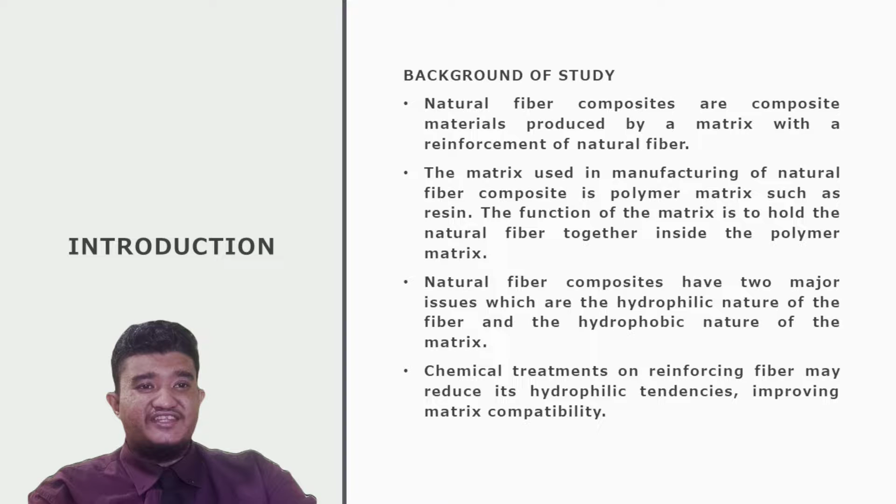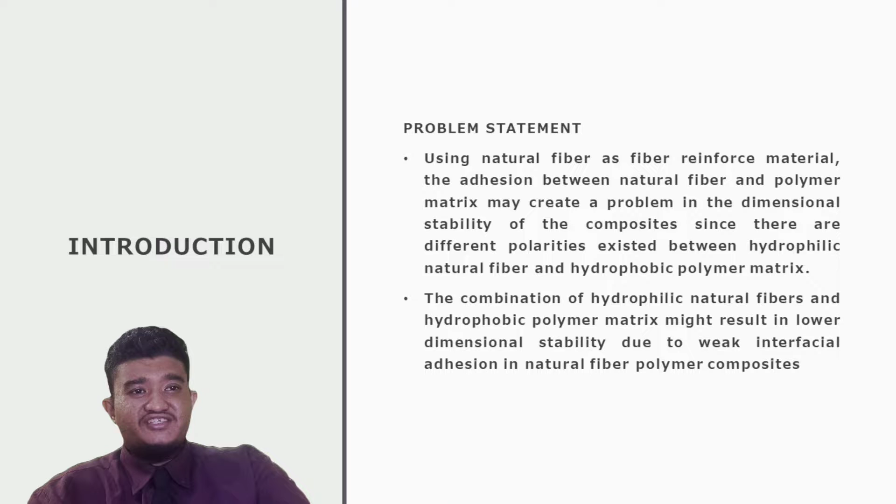Next is problem statement. Using natural fiber as fiber reinforced material, the adhesion between natural fiber and polymer matrix may create a problem in the dimensional stability of the composite, since different polarities exist between hydrophilic natural fiber and hydrophobic polymer matrix. The combination of hydrophilic natural fiber and hydrophobic polymer matrix might result in lower dimensional stability due to the weak interfacial adhesion in natural fiber polymer composite.

Next part is significance of study. From this study, the researcher will get information about the effect of chemical refinement on natural fiber composite properties. The information obtained will guide them on fabrication of natural fiber composite in selection of the best chemical refinement method for the specific filler to be used. The finding from this research also can be used to aid researchers in developing new natural fiber composite with improved performance.

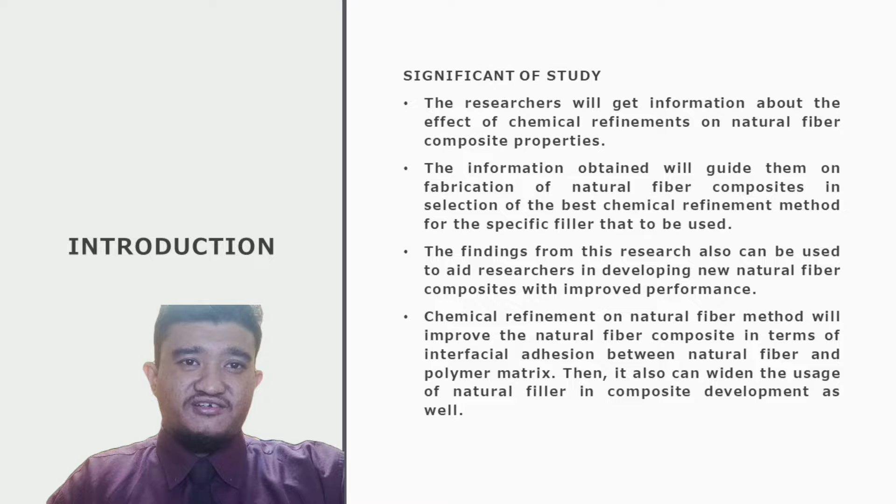Chemical refinement on natural fiber will improve the natural fiber composite in terms of interfacial adhesion between natural fiber and polymer matrix. Then it also can widen the usage of natural filler in composite development as well.

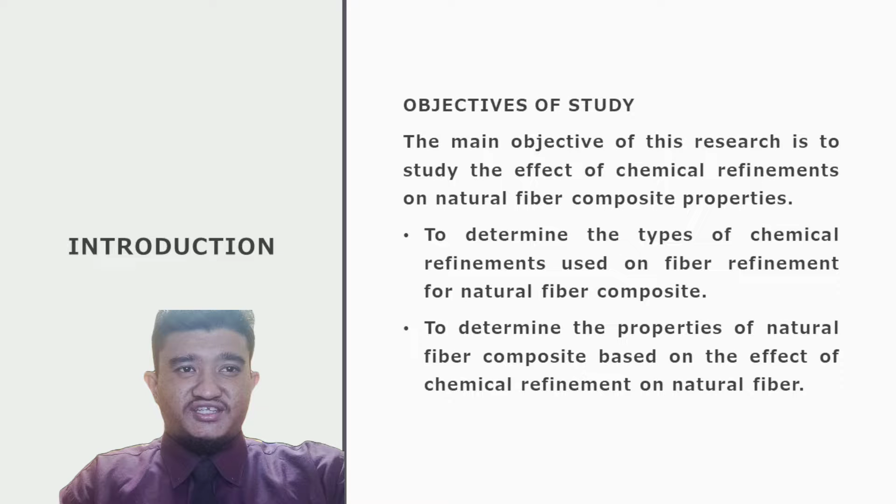For objective of this study, the main objective of this research is to study the effect of chemical refinements on natural fiber composite properties. This study suggests several research objectives to be achieved as follows. First, to determine the type of chemical refinement used on fiber refinement for natural fiber composite. And second, to determine the properties of natural fiber composite based on the effect of chemical refinement on natural fiber.

Next, we move on to literature review. I will summarize all chemical refinements being used in fiber refinement. From the finding in alkaline treatment, sodium hydroxide treatment reduced the hydrophilic character of the coir fiber, as demonstrated by the lower water absorption percentage of sodium hydroxide treated coir fiber composite.

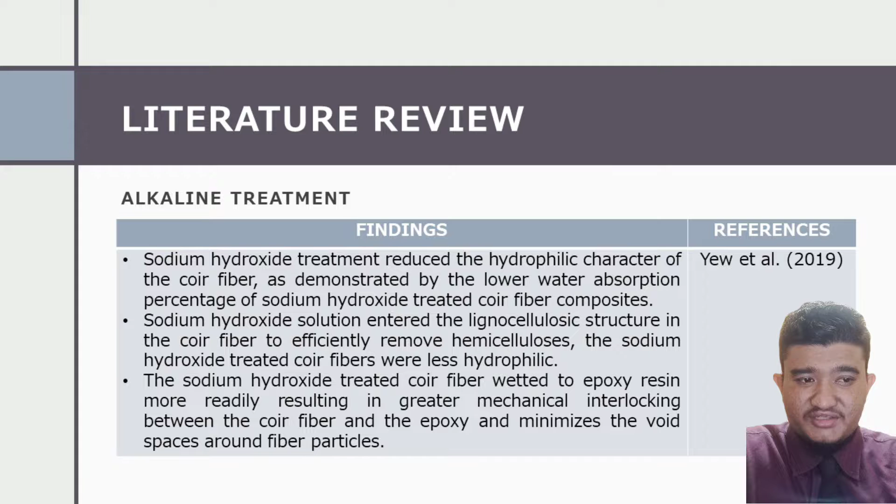Sodium hydroxide solution entered the lignocellulosic structure in the coir fiber to efficiently remove hemicellulose. Then the sodium hydroxide treated coir fibers were less hydrophilic. The sodium hydroxide treated coir fiber wetted to epoxy resin more readily, resulting in greater mechanical interlocking between the coir fiber and the epoxy and minimizing the void space around the fiber particle.

Next chemical refinement method is silane treatment. From the finding, the silane treated polylactic acid short bamboo fiber composite obtained the highest mechanical properties in tensile strength and Young's modulus. The silane treatment improved interfacial adhesion between the resin and the fiber, as well as the mechanical properties of the composite.

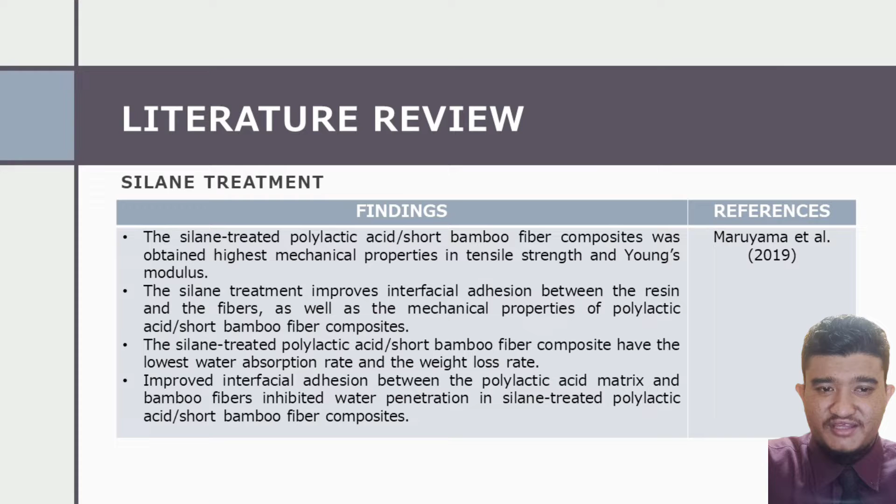The silane treated composite has the lowest water absorption rate and weight loss rate. Improved interfacial adhesion between the polylactic acid matrix and bamboo fiber inhibited water penetration in silane treated composite.

Next, we move on to acetylation treatment. From the finding, the tensile strength and modulus, also flexural strength of polypropylene acetylated banana bunch fiber composite increased due to the removal of lignin and extractables, slight increase in cellulose content, and a little portion of hemicellulose converting to acetylated hemicellulose. The acetyl group reaction reduced the hydroxyl groups on the fiber surface, making the fiber more hydrophobic.

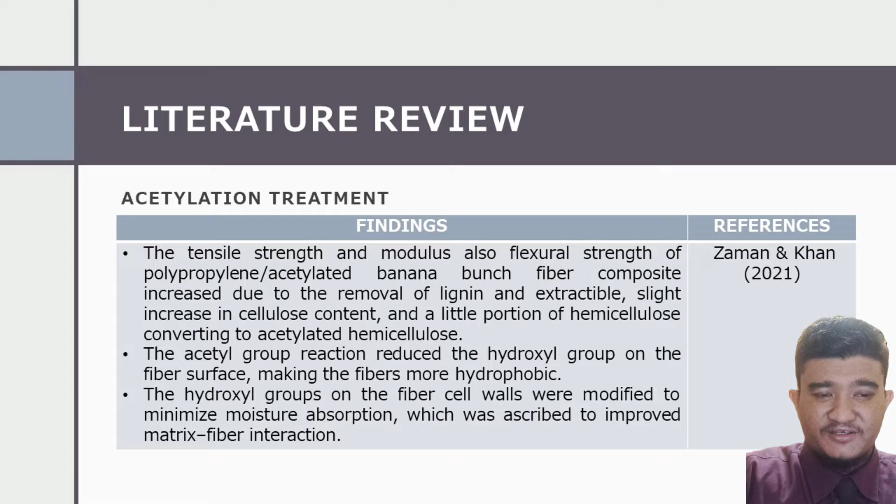The hydroxyl group on the fiber cell walls were modified to minimize moisture absorption, which was ascribed to improve matrix fiber interaction.

Next part is benzylation treatment. From the finding, the removal of lignin and hemicellulose may have improved tensile strength by making it easier for the fibers to reorganize in the tensile direction and causing higher tensile strength.

The benzylation treatment removed contaminant from the surface of the fiber and improved the interface quality by interfering with the moisture absorption process. Due to the fibrillation effect, the treated fiber displayed a considerable improvement in interfacial shear strength value after benzylation treatment. Fibrillation increased the surface area available for interaction with the matrix material for penetration and bonding with the fiber cell, resulting in improved interfacial adhesion.

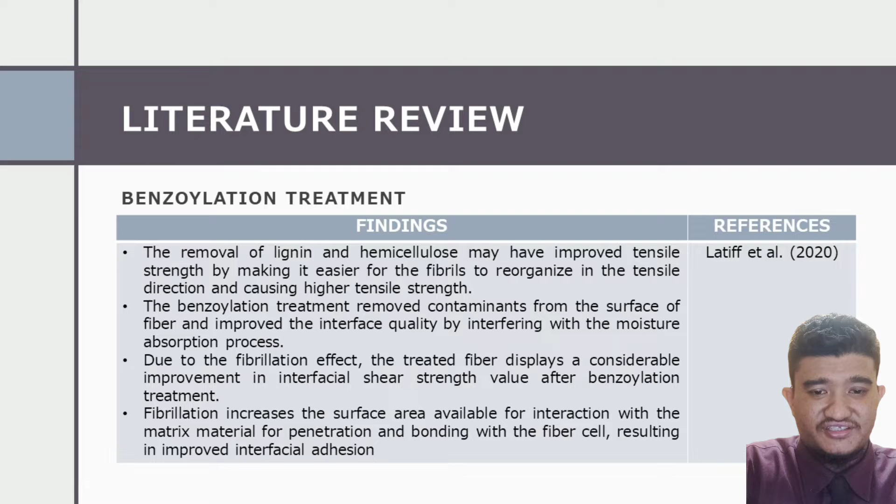Next is sodium citrate treatment. From the finding, the increase of tensile and flexural properties of treated composite may be explained by the fact that a stronger fiber matrix adhesion results in more stringent limitation on relative displacement between fiber and matrix, especially in the

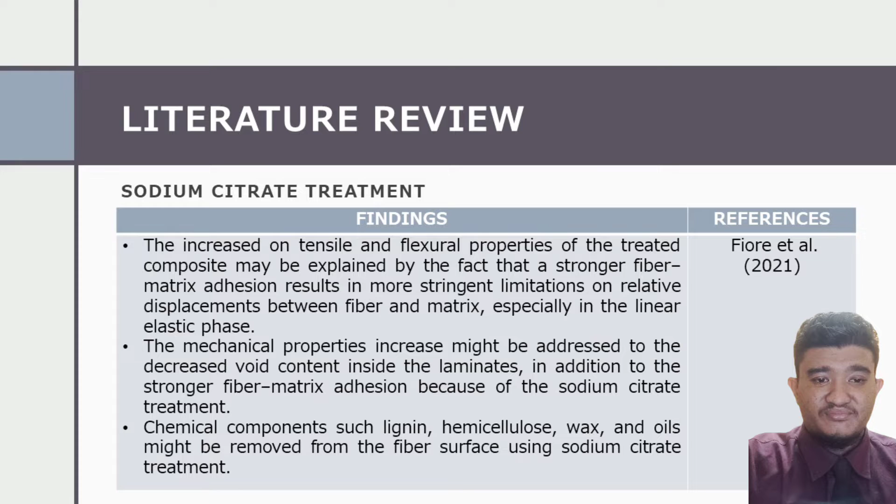linear elastic phase. The mechanical property increase might be addressed to the decreased void content inside the laminates in addition to the stronger fiber matrix adhesion because of the sodium citrate treatment. Chemical components such as lignin, hemicellulose, wax, and oils might be removed from the fiber surface using sodium citrate treatment.

From the finding on stearic acid treatment, the tensile strength of the stearic acid treated empty fruit bunch fiber composite was increased. The presence of the carboxyl group of stearic acid was able to create hydrogen bonds with the hydrophilic group of the cellulose, and the hydrocarbon chain with the matrix of the polymer, which is a hydrophobic group.

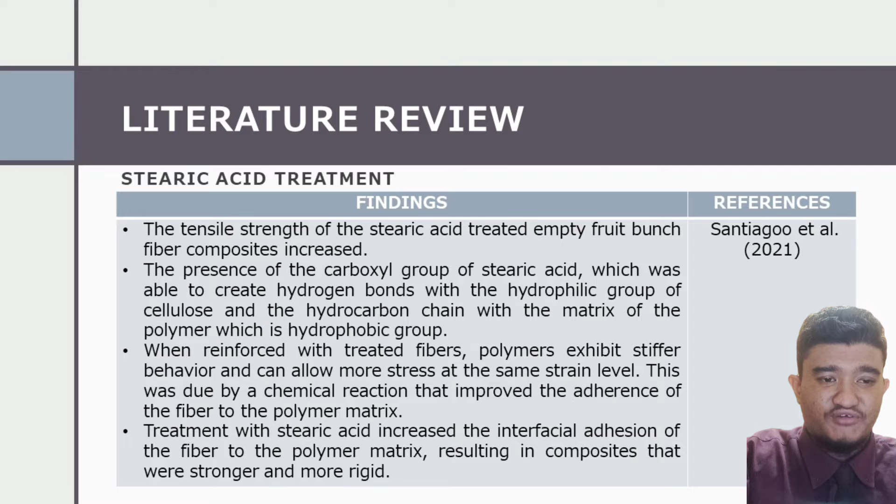When reinforced with treated fiber, polymer exhibits stiffer behavior and can allow more stress at the same strain level. This was due to a chemical reaction that improved the adherence of the fiber to the polymer matrix. Treatment with stearic acid increased the interfacial adhesion of the fiber to the polymer matrix, resulting in composites that were stronger and more rigid. Last part in chemical refinement is sodium bicarbonate treatment.

From the finding, the tensile strength of sisal fiber rises with sodium bicarbonate treatment. The establishment of strong hydrogen bonds between cellulose fibrils causes partial elimination of hemicellulose, resulting in compact packing in cellulose

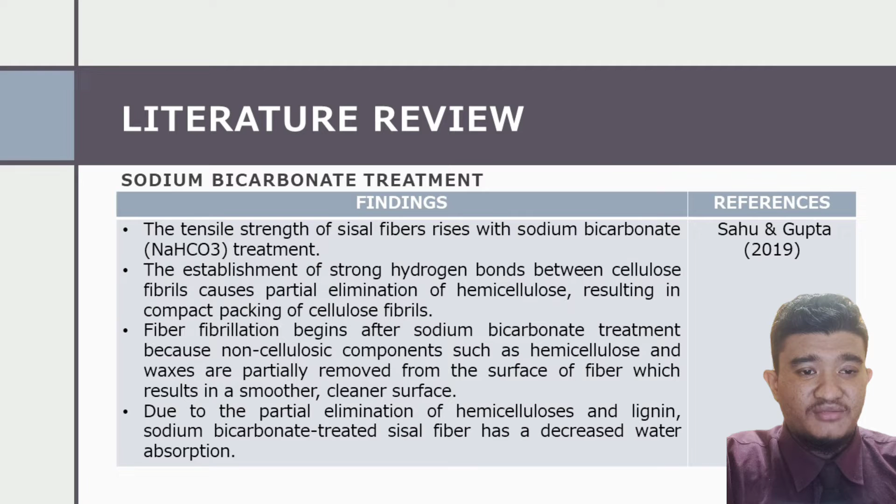fibrils. Fiber fibrillation begins after sodium bicarbonate treatment because non-cellulosic components such as hemicellulose and wax are partially removed from the surface of fiber, which results in a smoother and cleaner surface. Due to the partial elimination of hemicellulose and lignin, sodium bicarbonate treated sisal fiber has a decreased water absorption.

In conclusion, the chemical refinement of natural fiber can improve the mechanical properties of natural fiber composite. The chemical refinement of the fiber may not only change the fiber surface, but also improve the fiber strength to increase adhesion between the fiber surface and the polymer matrix, so the water absorption of composite will reduce and their

mechanical properties will improve. Alkaline treatment is the most used technique in chemical refinement of fiber because of its effectiveness and its low cost compared to other treatments. Based on the chemical refinements that were included in this review, each treatment applied on natural fiber will give different results on properties of natural fiber composite.

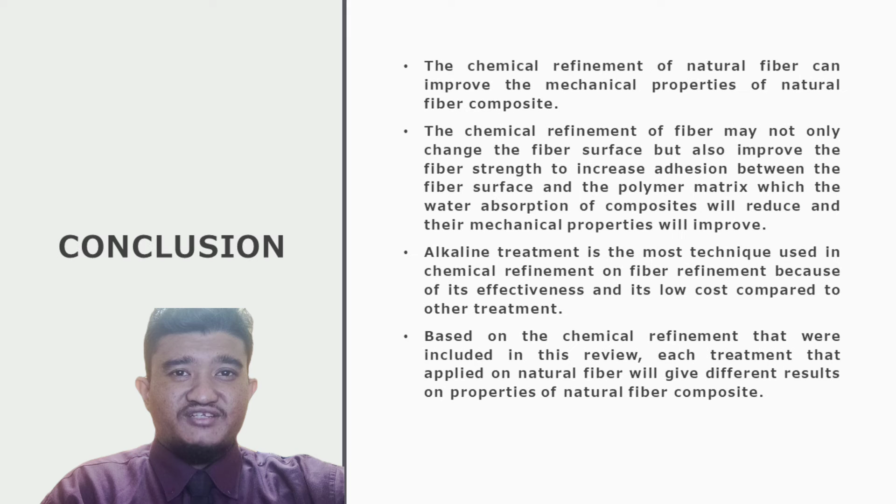For recommendation, it is recommended to do more research on fiber refinement in determining a new technique for the chemical refinement of natural fiber. Doing new research on fiber refinement will discover a new technique for chemical refinement of natural fiber that can be used and applied in the future.

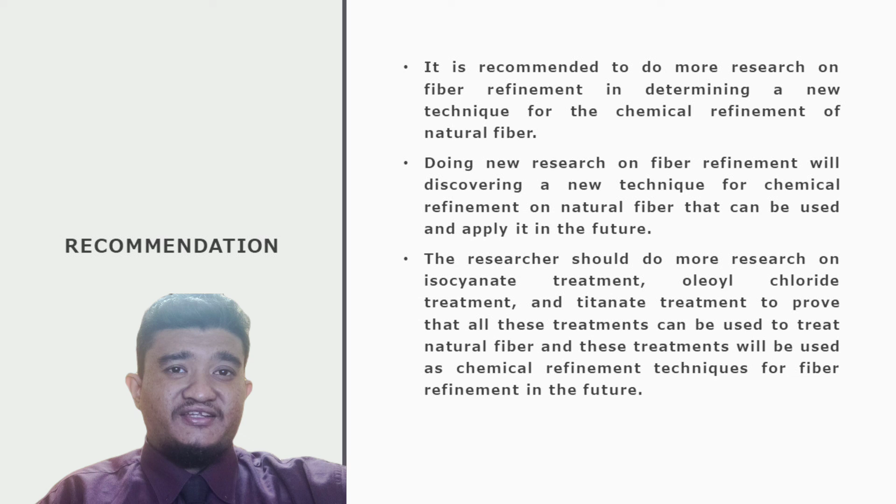The researcher should do more research on isocyanate treatment, oleoyl chloride treatment, and titanate treatment to prove that all these treatments can be used to treat natural fiber, and these treatments will be used as chemical refinement techniques for fiber refinement in the future.